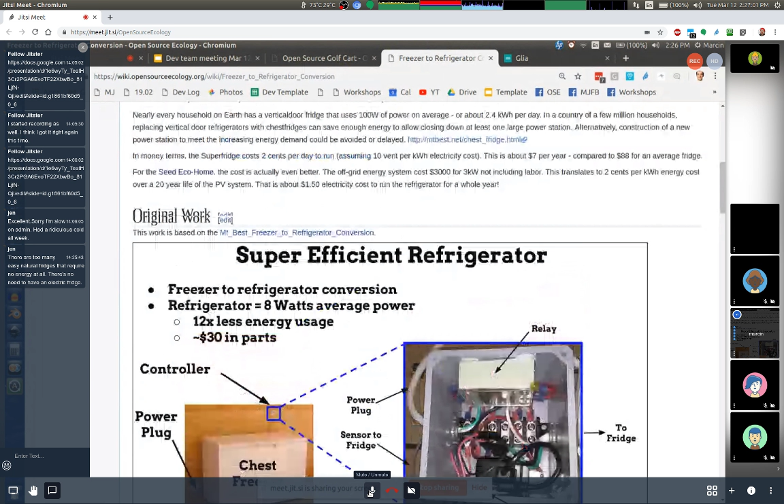That means we're adding the refrigerator to our open source blueprint set because this is ridiculous. We can't have everybody go through this. If you're going to be super efficient, you get punished. Look at the numbers: there's 126 million households with one fridge. The power saved per year, if you were to do that, is 50 million megawatt hours of electricity per year in the United States alone. Dollars saved per year in America.

Is there a reason you're not using evaporative fridges instead? They don't require any energy. Yeah, if we could get our hands on that, that would be good. That means evaporative, you probably have to have it integrated with the sun. That's more complex, so more integration. Yes, we'd love to do it, but we don't have the design for that.

Something that would be good - it would have to be a system that really works. For us, this has been working honestly for the last 2 years, 1.5 years. Very low energy, so 8 watts.

And then, do you have any particular ones that you think would work for the Seed Eco-Home? I'm gonna look some up right now. I didn't know that you were working on fridges. It's just something that because of the whole prepper thing has come through my feeds on social media for years. I'll look some up - I haven't had a need to use one, but I'll look some up for you.